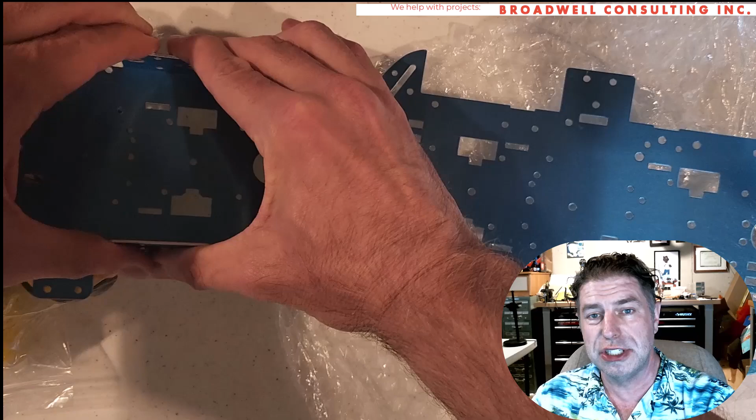The nice thing is it comes with all of the hardware you need to build the thing up, including 2 of the sheet metal robot chassis, one of which has bent down sides to hold the motors, the other which is just flat for supporting your electronics and whatnot. So the first thing I wanted to do was to be able to build a model around this so that I can engineer how I'm going to put the thing together.

And in order to do that, I wanted to create a model of the deck. And so let's go through how we're going to do that. In short, we're going to scan it. We're going to turn the scan into a black and white bitmap. We're going to take the bitmap and turn that into a vector in Inkscape. Then we're going to import the vector into Fusion.

And from there, we will take that vector and draw the shape of the thing and the cutouts and all those using minimalist, basically just lines, rectangles, arcs, splines, and the normal sketching tools. So let's take a look real quick at how you do that. Let's start with the scan.

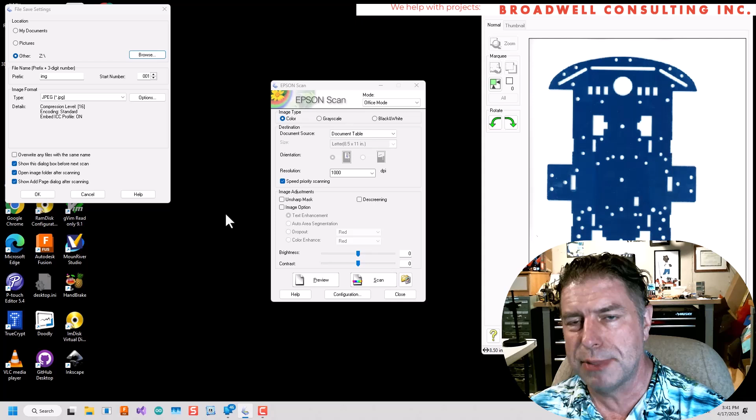I'm going to scan the part, being careful when I set it onto the scanner not to scratch the glass with the metal, and then go into the Epson or whatever your software would be, and I'm going to scan it. In my case, I like to scan at 1000 dpi. That way later, if I want to take direct measurements off of the bitmap, it's easy because 1 pixel equals 1/1000th of an inch. And so basically, I'm just going to scan this in a very fundamental fashion to a JPEG that I can then import into Inkscape.

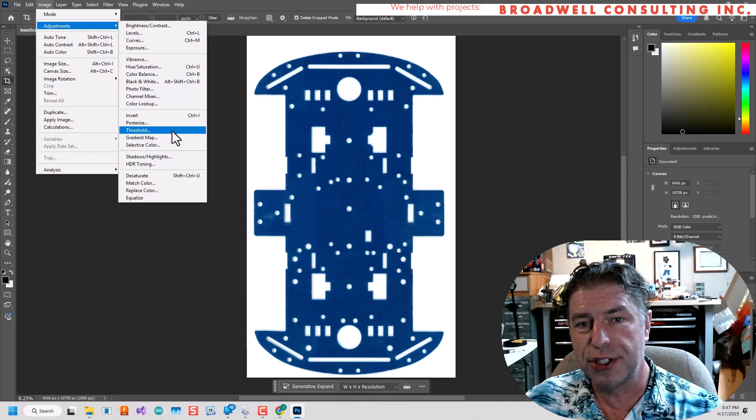Before we import the image into Inkscape, we will run it through Photoshop. We'll use the crop function to get only the part of the image that we want, and also its straighten aspect to try to get the image as orthogonal as possible. And we will also use the threshold and despeckle functions to try to clean up the image a little bit before we turn it into a vector.

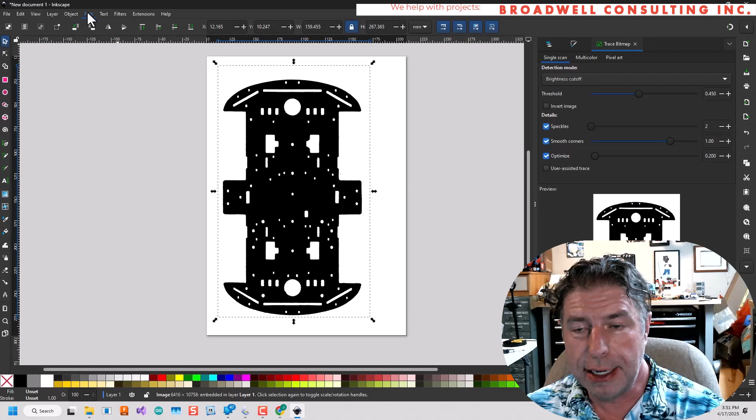Next, we'll open Inkscape, and we will just drag the image from the file manager in Windows into Inkscape, and it'll show up. We'll embed it in the file. And then we will go up to Path, Trace Bitmap, and generally speaking, the default values work just fine. We'll go ahead and do that.

And then finally, we will select Fill and Stroke. We will delete the bitmap, leaving only the vector, and then we will select fill and stroke and change it to a black stroke with no fill so that it's ready to go into Fusion.

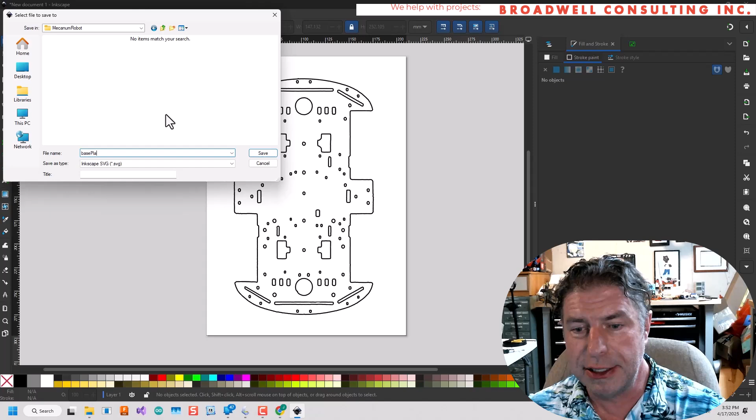Now we're ready to import into Fusion. We're going to go to a new design, create a sketch on the top plane, and then go to insert SVG file and pull in the SVG. We'll say OK, and it will place it. That SVG file is almost certainly going to have the wrong scaling.

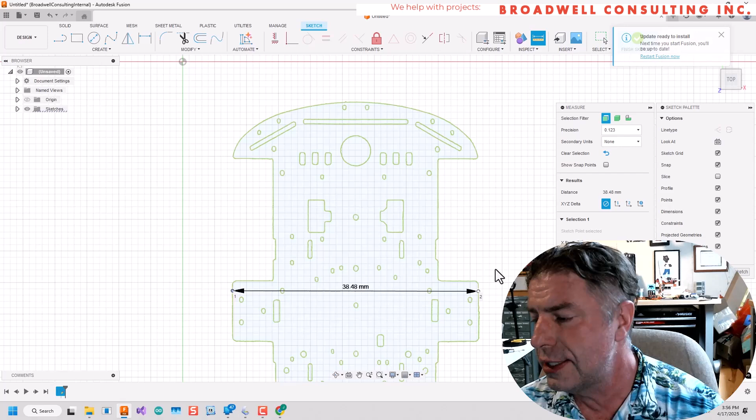And so we're going to do a measure inside of Fusion to see what one particular measurement that's practical for us to measure with a set of calipers on the real part is. And in this case, we will take the 2 kind of center sides of the metal plate, and we can see here that it's 38.48.

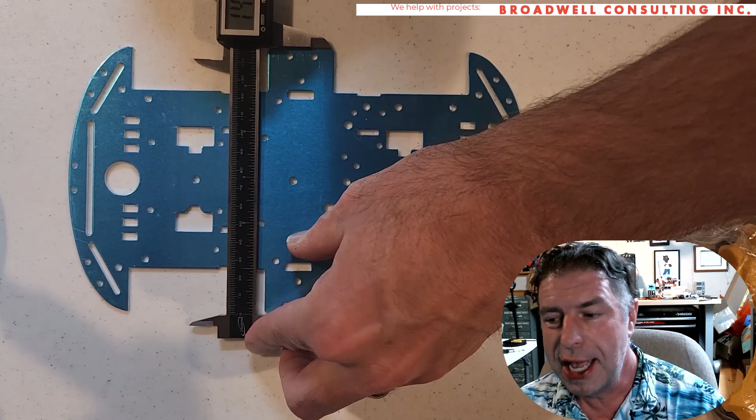Next, we will measure the real value on the metal plate using calipers. And in this case, we see that it is 149.2 millimeters. Next, we're going to delete the existing sketch because it has the wrong scaling. Then we will insert the sketch again.

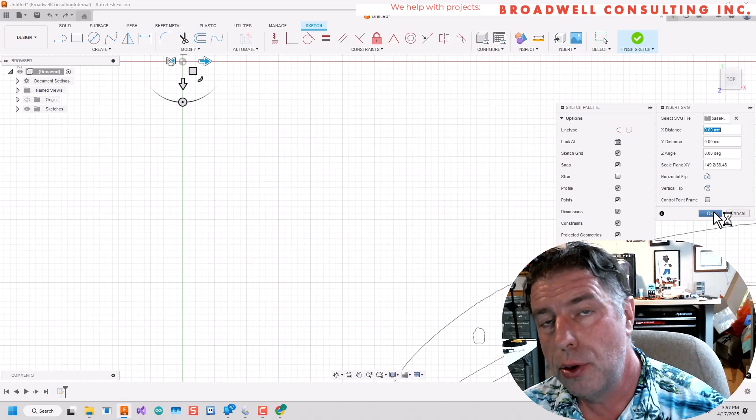This time in the scaling section of the dialog box, we will insert 149.2, which is the desired width, divided by the 38.48, which is the default width that we get when we import it, and that will properly scale the SVG file to the actual size that we want.

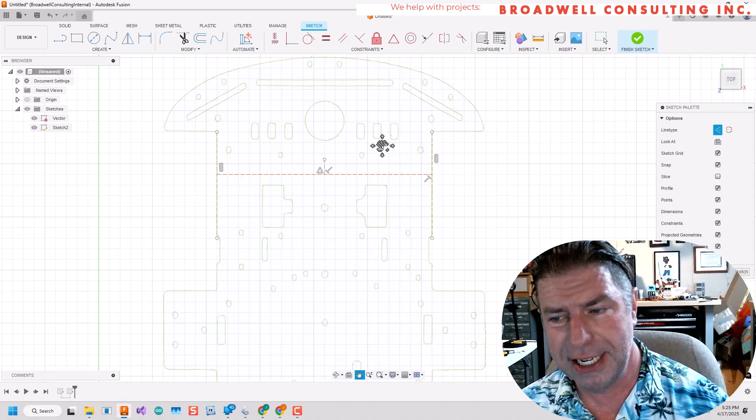The object we're trying to recreate is largely symmetric, so it will be convenient to have symmetry lines. We're going to create a new layer, and on that layer, we're going to, using vertical and perpendicular constraints, create some lines of symmetry that we will use so that we only effectively have to recreate 1/4 rather than the entire object. It's not entirely symmetrical. Some of the holes appear in some sides and not others, but for the most part, this will benefit us greatly.

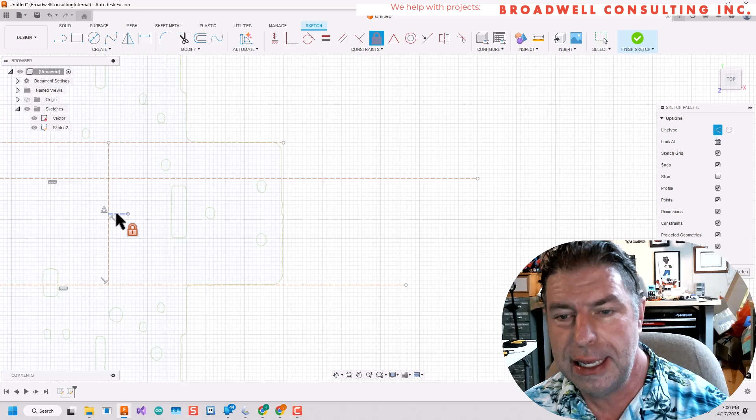As we go along, you'll see us using the midpoint constraint, the collinear constraint, and locking and unlocking various items that we want to keep moved. One of the things to note in Fusion is that things that are green are locked. They cannot move. Things that are not green can move. And so you can see the entire bottom vector that we imported is locked. It will not move. And we're going to create our lines of symmetry locked so they can't move either.

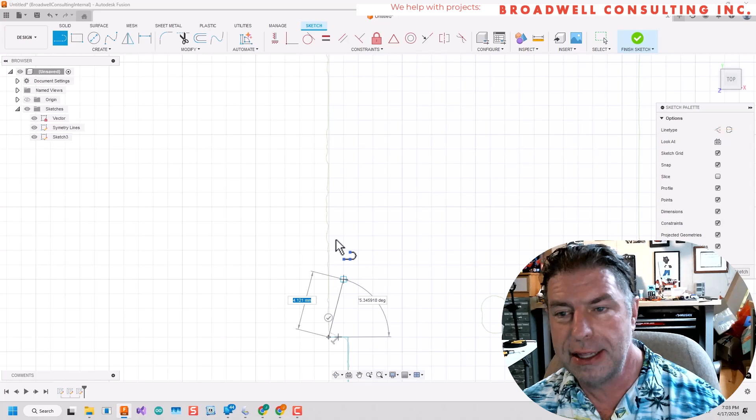Next, we'll create another layer and do the outline of the part, which is what will be extruded, less the holes. We're going to just draw the upper left-hand quadrant and then use the mirror function of the sketch capability to mirror it across the two axes that we created.

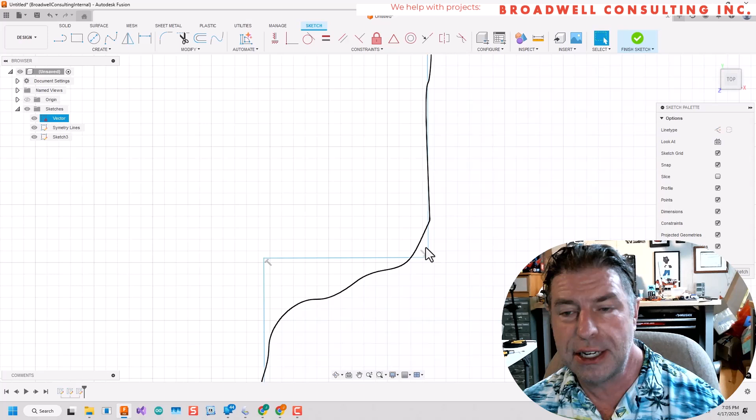We'll start by drawing all of the long straight lines, and then we will use either arcs, splines, or the fillet option to create the curves. We'll use splines for things that don't have a constant curve. We'll use 3-point arcs for things that do. And for small curves, like the ones that essentially just round off corners, we'll use the fillet tool. Those seem like the easiest ways to get this done to me.

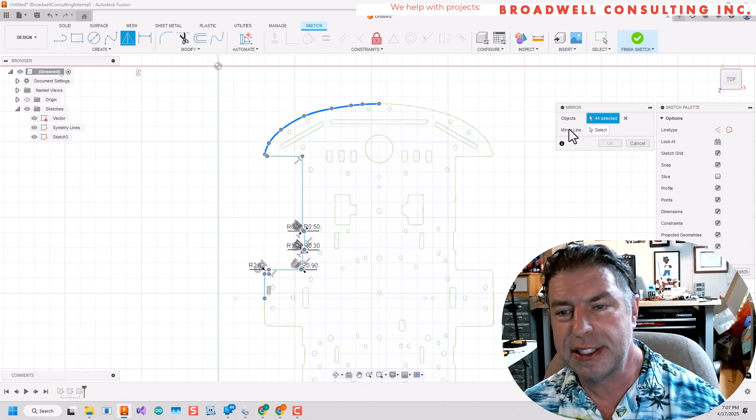Ideally, when using the mirror tool, everything matches up perfectly across your line of symmetry. If you get a closed space, you get blue. Essentially, an enclosed area that can extrude turns blue on a sketch. In our case, we saw that that didn't happen right away. We had to zoom in slightly and add a couple of small lines connecting the sketch lines that cross the horizontal axis in order to get a closed shape. And once we did that, we were able to extrude it.

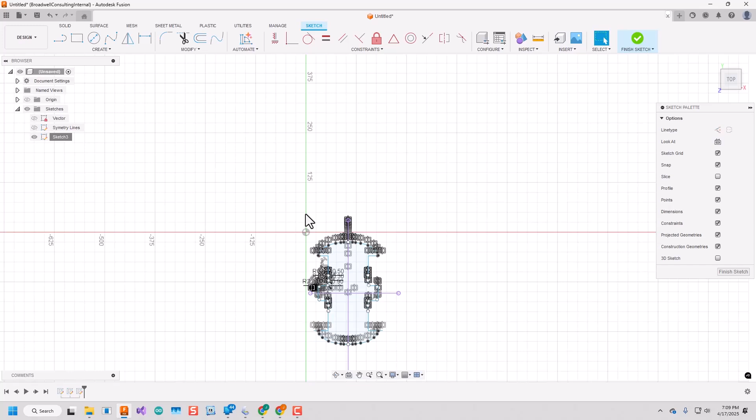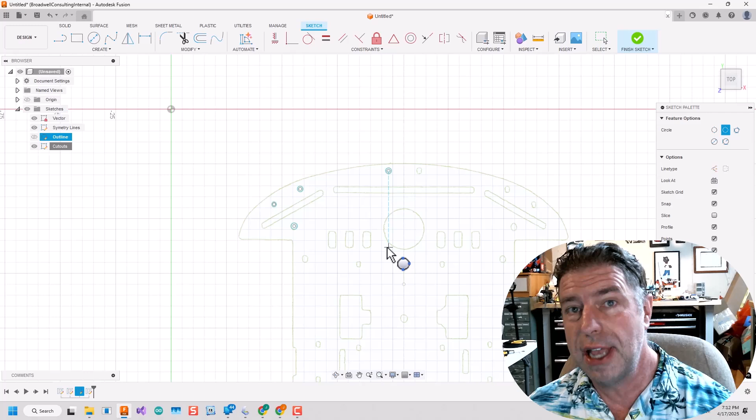Next, we're going to create a couple of layers for the holes that go through the board. We're going to create one layer for things that are symmetrical and one layer for things that are not. Right now, I'm just going to base this off of the sketch that I took. I didn't have any gauge pins handy. I ordered a set of these for this project. And so eventually I will put those in and gauge measure the actual size of the holes.

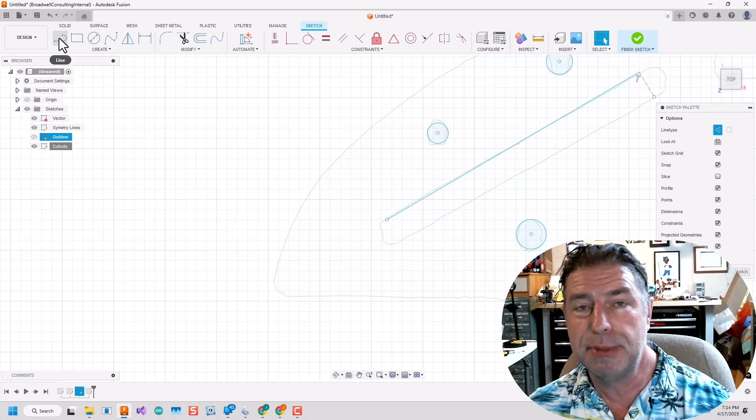And what I anticipate then is using the equal constraint on all of the holes that are the same size, and also creating a parameter under modify parameters that will allow me to say how big I want a hole to be. Because, for instance, a 2mm hole may not print out to be 2mm on a 3D printer. So I may want to have a parameter to say, okay, I want a 2mm hole. What size do I need to draw it in Fusion in order to actually get a 2mm hole based on the print settings that I typically use?

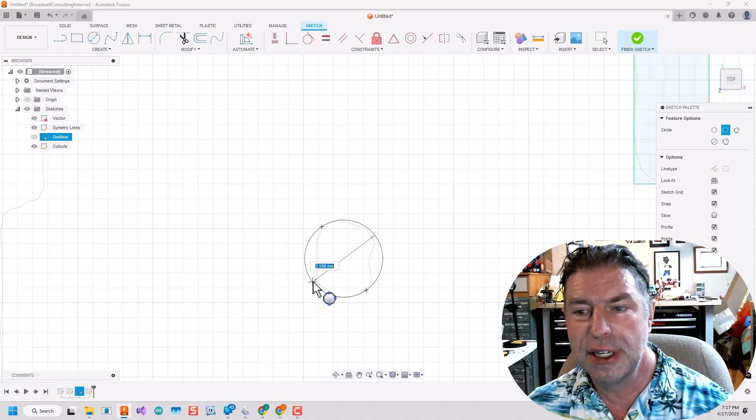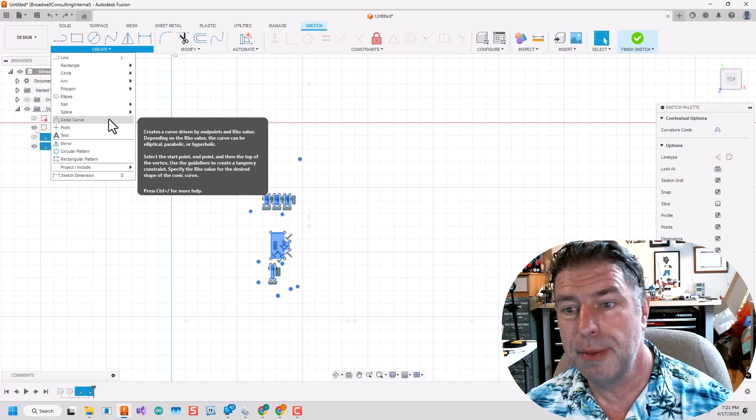So we're going to go through and use a combination of rectangles and 3-point circles to do our best to reproduce the holes and slots that are on this. We'll also use some arcs at the end of the long slots at the top, and note that we're using some perpendicular constraints and other things to create those slots as well. And again, we will use the mirror command to then mirror the holes that are symmetric across the various axes. Finally, we will add another sketch that covers holes that are not symmetric.

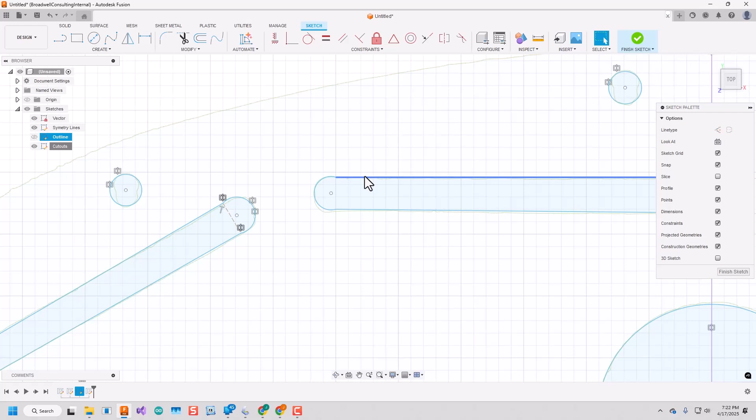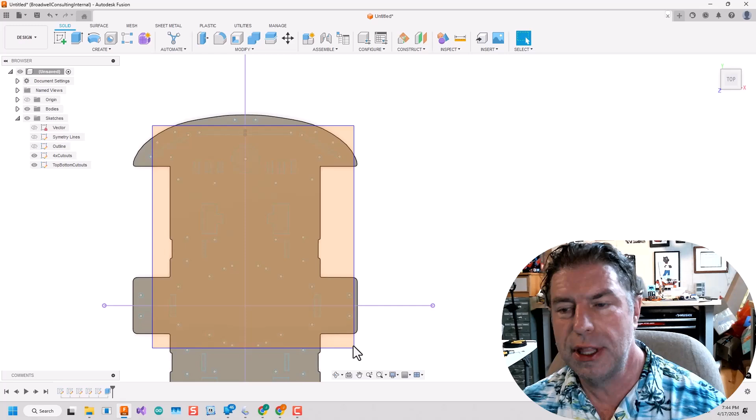So I took a calipers and measured the width of the plate. It is 1.6 millimeters. And so we will extrude the outline 1.6 millimeters to get a 3D solid object. Then we will use the two sketches that we created with the holes and do an extruded cut through the 3D object that we extruded from the outline in order to create our finalized board.

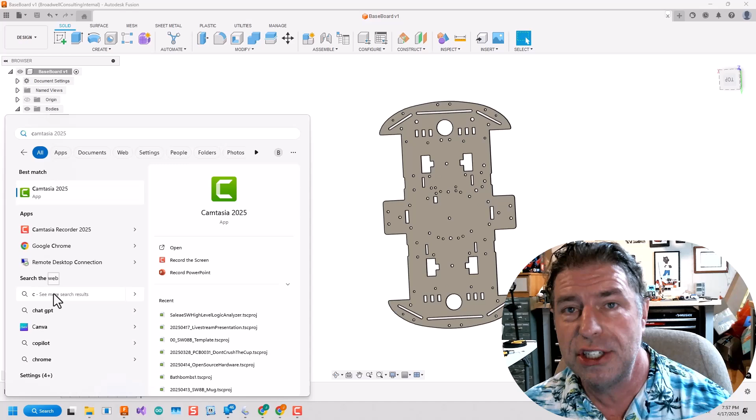Okay, that looks good. Let's save that as a mesh and put it into Ultimaker Cura. I'll run it on my Elegoo printer, and we will do an actual 3D comparison of the model we built versus the real thing. And we know it's not going to be perfect. There's probably some holes that are not in the right space. Because of the way that the shadows fall through the scanner, it's never going to be perfect. But as you can see, in a very short amount of time, we create a pretty detailed copy of this thing. So let's take a look and see how accurately it fits.

Wow, I really like that. Running over it with my fingers, holding it up either side to the light, I don't see much of the metal at all through the holes of the plastic, and I don't see much of the plastic at all through the holes of the metal. That seems like a really, really good start for us as we start to create our robot.

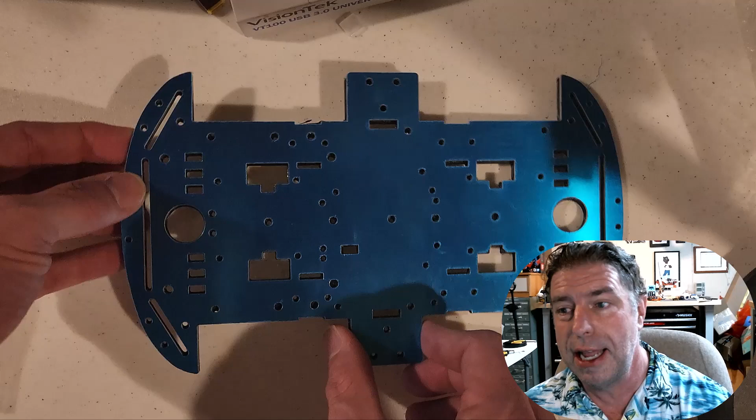And basically, there's a few things we could do with this model now. I can 3D print it. I can export it and laser cut it in other materials, or I could use it as the basis for an actual circuit board in the future, where instead of using wires, we primarily mount the components that we want on the board and run traces instead of wires.